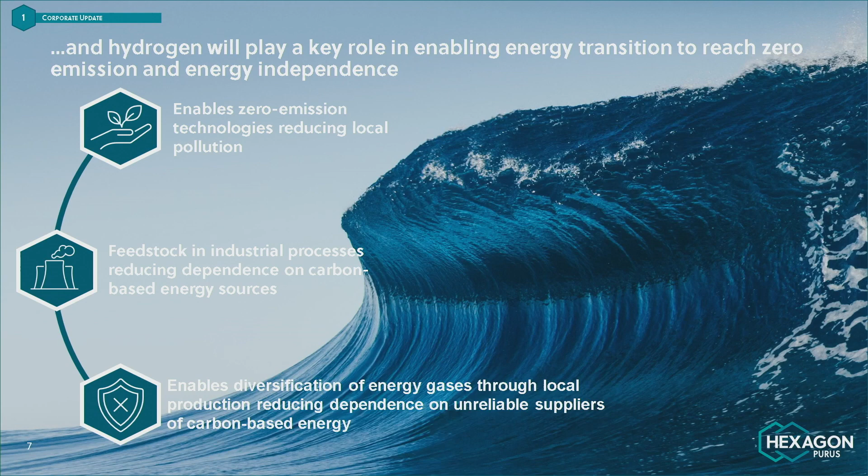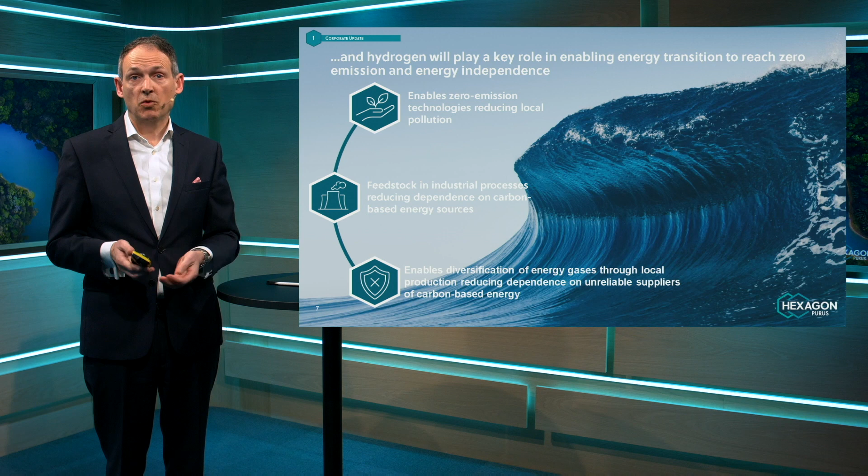Every sector of society will need to reduce harmful greenhouse gases from their operations. The transportation sector is responsible for almost 20% of global CO2 emissions, and these emissions will need to be cut by 75% by 2050 if we're going to meet the 1.5-degree target set in the Paris Agreement.

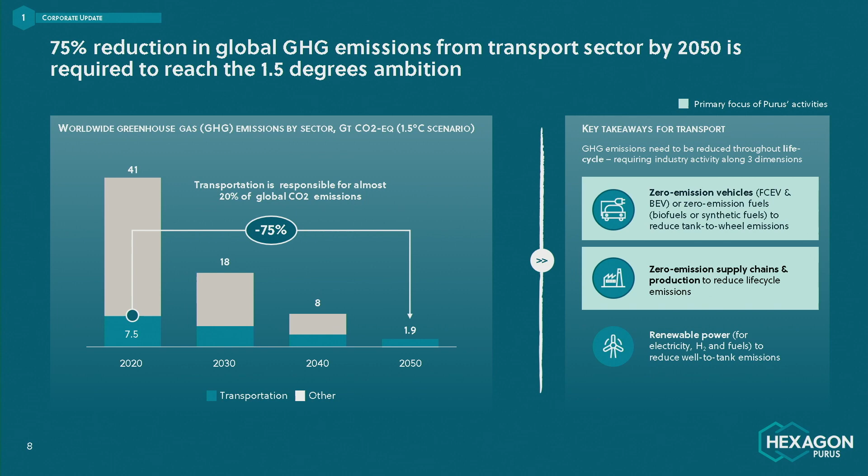This will require three things. Vehicles will need to be zero emission and electrified, either battery electric or fuel cell electric, so that they can run on renewable energy, with no tailpipe emissions or tank-to-wheel emissions. Number two, the supply chains, including production and distribution, will also need to be zero emission. And three, there needs to be enough renewable energy available. Then we will achieve zero well-to-wheel emissions.

And Hexagon Purus has an important role to play in achieving that target. We are a technology company providing zero-emission mobility solutions. We focus mainly on two areas. One is the mobility applications, the vehicles themselves, providing energy storage and vehicle integration. The other is the infrastructure side, the stuff that's needed for people to use the vehicles: hydrogen distribution modules, stationary storage, mobile refueling, and so forth. We provide technology that enables vehicles to run on renewable energy, and as such, we play a key role in the energy transition and in the overall quest to remove carbon emissions from the transportation sector.

There are two main technologies to support zero-emission drivetrains: hydrogen and batteries. These are often talked about as opposing technologies, that it's either one or the other. We don't see it that way. We believe these are complementary technologies and both are relevant. Each has its pros and cons, and which one you choose mainly depends on the customer requirement and the duty cycle the vehicle needs to serve.

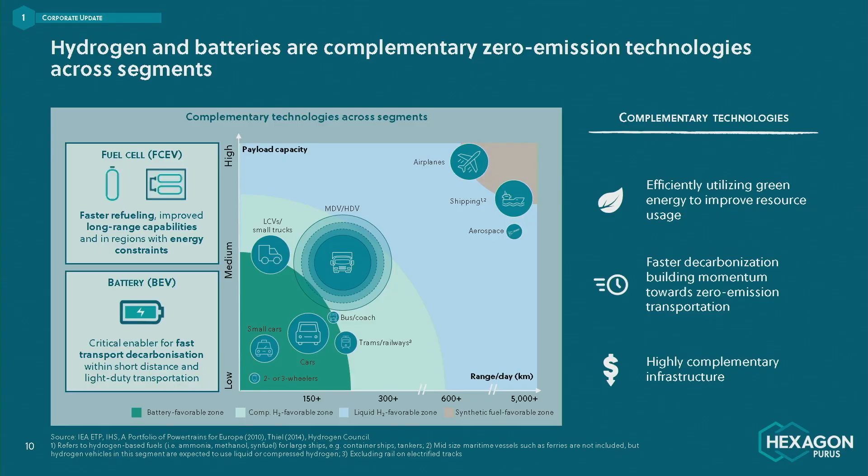Battery technology for vehicles is by now well proven. Batteries provide very efficient energy storage, but they're heavy and take a long time to charge. Hydrogen technology is a few years behind in maturity, and although less energy efficient, it gives you things you don't get with batteries: longer range and fast refueling.

So the main rule is: the shorter the distance and the lighter the weight, the more batteries will be competitive. And the opposite of that is the longer the range and the higher the payload, the more hydrogen will be competitive. Looking at this illustration, you see the two key parameters of the duty cycle, payload and range, and the typical zones favorable for each technology.

Let's take a couple of examples. Passenger cars are reasonably lightweight and don't have much payload, and the majority typically travel fairly short daily distances. We believe most of those will be battery electric. The typical electric passenger car today gives you 400 to 500 kilometers of range, which is more than enough for most people, and you can charge it at home during the night.

There will likely also be some hydrogen electric passenger cars, those towards the heavier side of the spectrum, or those that require more continuous use. But most of them will be battery electric.

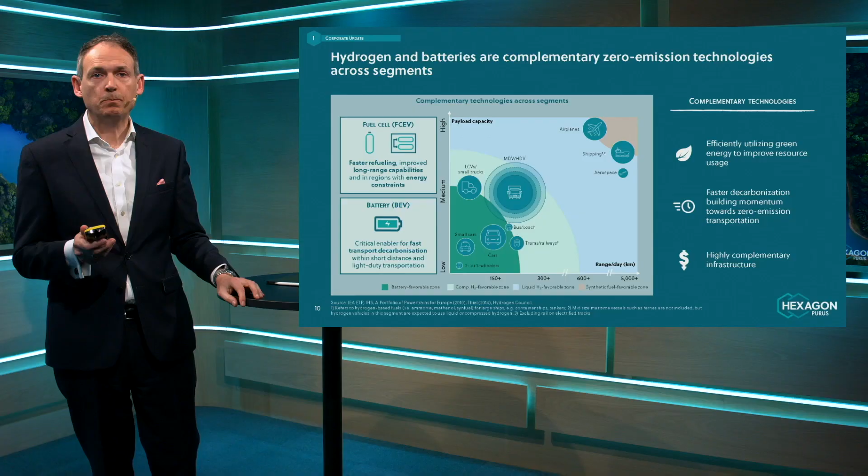These systems go on to the end-use applications, the vehicles, and we make energy storage systems for a wide range of vehicles across the mobility spectrum: cars, buses, trucks, trains, maritime vessels, and also for the infrastructure part: distribution modules, stationary storage, and mobile refueling units.

In North America, we also provide electric drivetrain integration and full vehicle integration for medium and heavy-duty trucks, again both battery and fuel cell electric. So we provide energy storage technology that enables vehicles to operate on renewable energy, but we don't provide the electrons, we don't provide the molecules.

Let's zoom in on our part of the value chain and look more closely at what we do. We work on three different levels: the component level, the system level, and the vehicle integration level. Starting with component, the core component in our offering is the hydrogen storage cylinder.

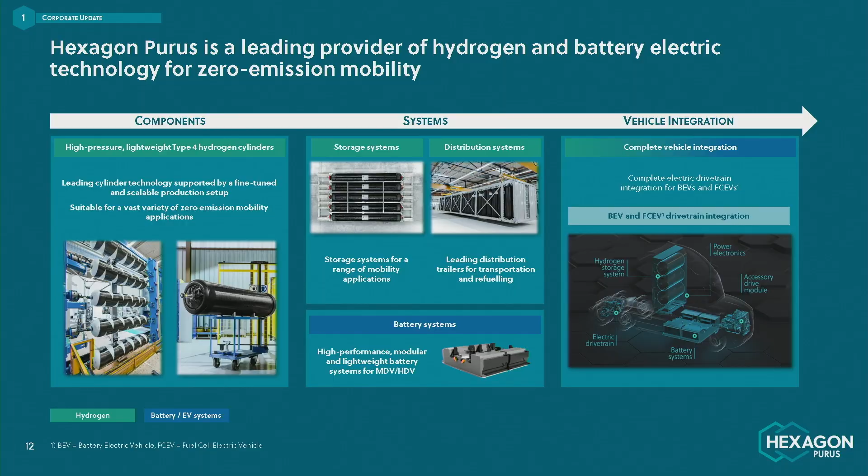The Type 4 cylinder is a pressure vessel that has a polymer inner liner overwrapped with high-strength carbon fiber. This cylinder is extremely robust and durable, while also lightweight, which makes it ideal as a tank to store compressed hydrogen gas on board vehicles.

It's far from a trivial component, since hydrogen is typically stored at an operating pressure of 700 bar. But as I will show in a minute, we have several decades of experience with this technology and know it very well.

So we can sell this cylinder as a component, and there are some customers that prefer that, but most often the cylinder is sold as part of a system. And the system is simply a combination of cylinders placed into a metal frame, complete with valves, piping, regulators and so forth, that feeds the hydrogen from the cylinder to the fuel cell or wherever it needs to go. The system can either be a storage system for vehicles, or for distribution or infrastructure purposes. Michael will come in later and explain this in more detail.

And Todd will cover the battery system, which is a similar concept really, a collection of battery cells packaged together and optimized for storage of electrons on board a vehicle.

The third level is the vehicle integration side of the business. This is where we provide engineering design and full electric drivetrain integration for heavy-duty vehicles in North America. Starting with an empty chassis with 4 wheels and a cab on it, we design and assemble the complete drivetrain with a combination of our own storage systems, either battery or hydrogen, and third-party components to deliver a fully operational vehicle. So Todd's going to do a solid deep dive on this later on in the presentation.

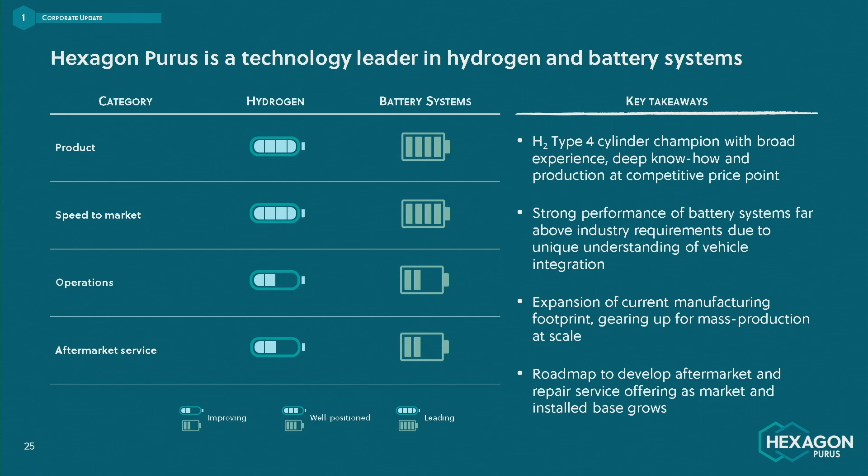We stack up well against all of these, where our edge is the product, driven by our deep technological know-how, and also the speed to market, driven by our strong customer-driven and technology-driven organizational DNA. When it comes to manufacturing and aftermarket service, we have some way to go, compared particularly to the automotive tier 1s who have mass production and cost reduction as a core part of their DNA.

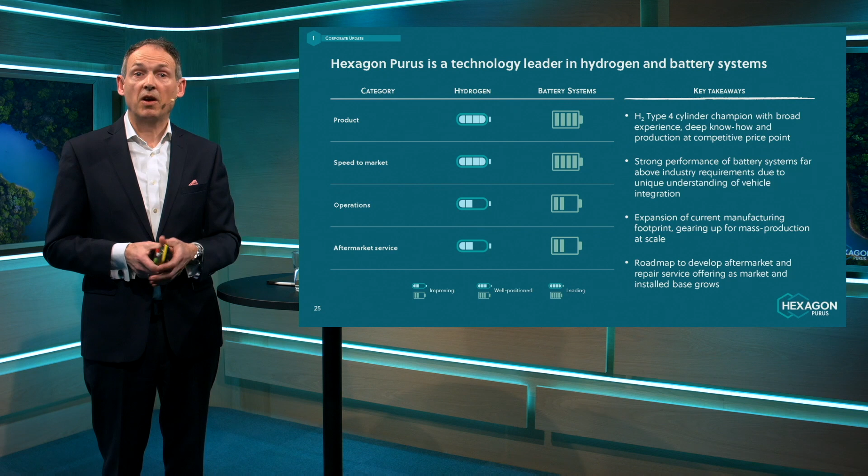However, mass manufacturing of composite pressure vessels, a highly engineered and specialized component, that's not trivial. It's actually quite challenging, as we also have learned over the past decades. There are very tight tolerances and zero room for mistakes. And remember that Hexagon is the company that has produced the most high-pressure Type 4 cylinders of any company. So we already have solid process knowledge.

But we will also need to build stronger manufacturing capabilities at larger scale. And we will need to build up a good service and repair organization along with the rapid increase of the installed base.

I do expect that there will be other players coming into the market in the future. This will grow quickly to become a very large market over the course of the next decade or so. And all the mobility segments and vehicle platforms will be transitioned away from fossil fuels and over to zero-emission drivetrains. And this will attract more players into this space.

I'm not concerned about it. We welcome competition. We need competition. Any healthy market needs several competitors to fight for customer positions. We're confident in our own capabilities. We are industry leaders today, and we believe that we will be able to stay ahead of the competition and remain industry leaders also in 2030 and beyond.

And the key to competitiveness will be cost efficiency, and the lowest total cost of ownership for the customer. This is why it's important to be an early mover and to win the early volume business, so that we can get faster up the learning curve and faster down the cost curve.

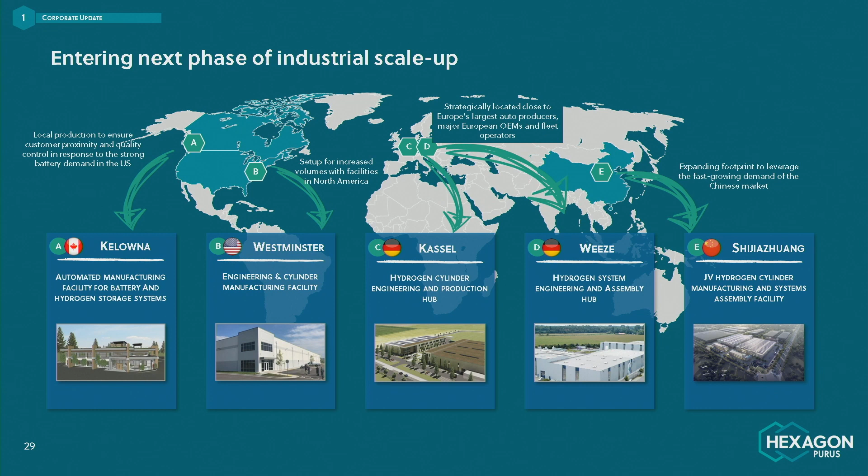And we have finally kicked off construction of the new facility in China, which we're building together with our joint venture partner. That will go up in Shijiazhuang, a few hours southwest of Beijing. So with these expansions, we will have the necessary capacity to meet expected customer demand towards the middle of the decade.

So that concludes my part of the presentation today, and I will now hand the word over to Michael Kleschinski, the Executive Vice President who heads up our cylinder and systems activities in Europe. Michał, please.

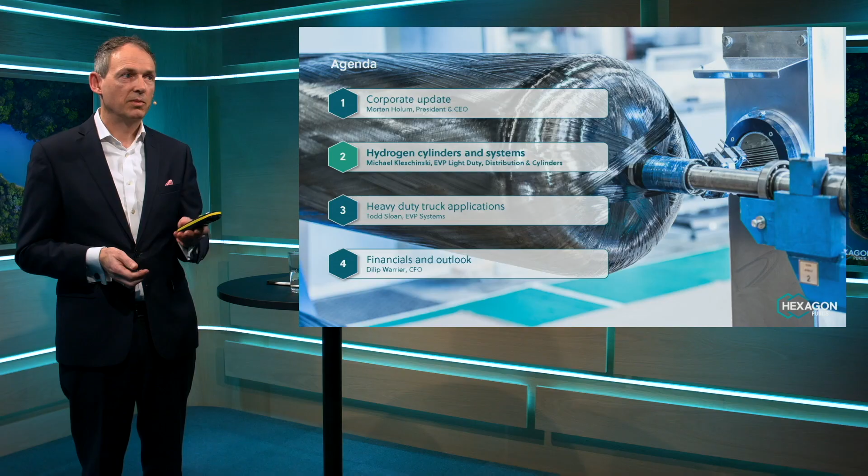Thank you, Morten. Let's have a look into our hydrogen cylinders and systems business.

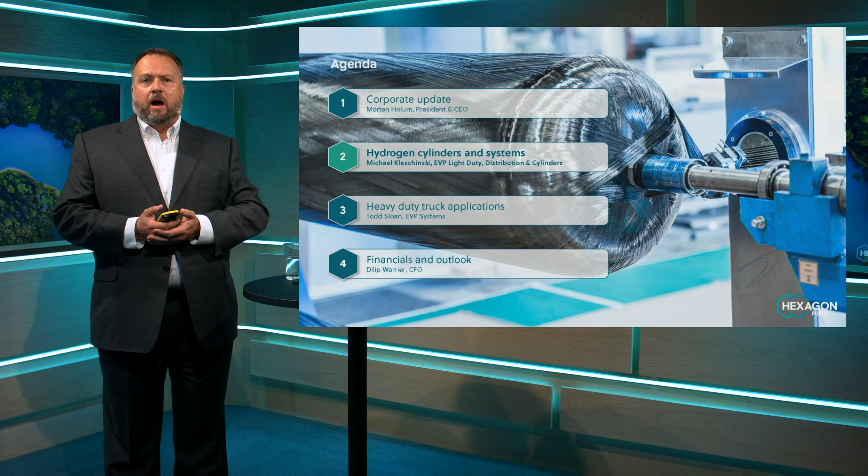Hydrogen is an important building block in decarbonization and energy independence. In the future, all hydrogen will be green, coming from electrolysis powered by renewable energy like wind and solar power. Hydrogen is the ideal partner of renewable energy, as it allows storing large amounts of energy until it's consumed.

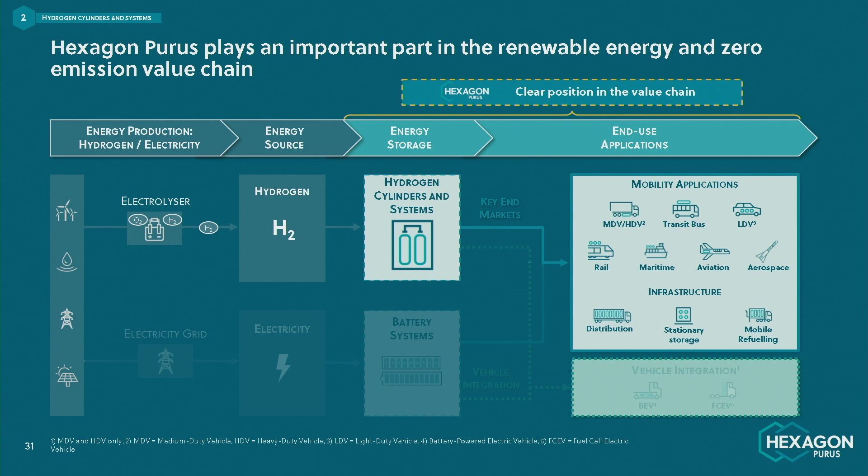Renewable energy is decentralized, so solar and wind is mostly not found where the energy is needed. Additional to storing the green energy locally, we must be able to transport the green energy to where it's needed. This is what hydrogen is capable of, and these are the solutions that we bring to the industry.

Our solutions are able to capture the hydrogen-bound energy and bring it to where it's consumed in industry and transportation. We don't make the molecule, but we store compressed hydrogen and provide storage and transportation solutions to the end-user applications. Our solutions are therefore an important building block of the hydrogen infrastructure.

In mobility, we provide onboard energy storage to all kinds of mobility, on-road and off-road as well.

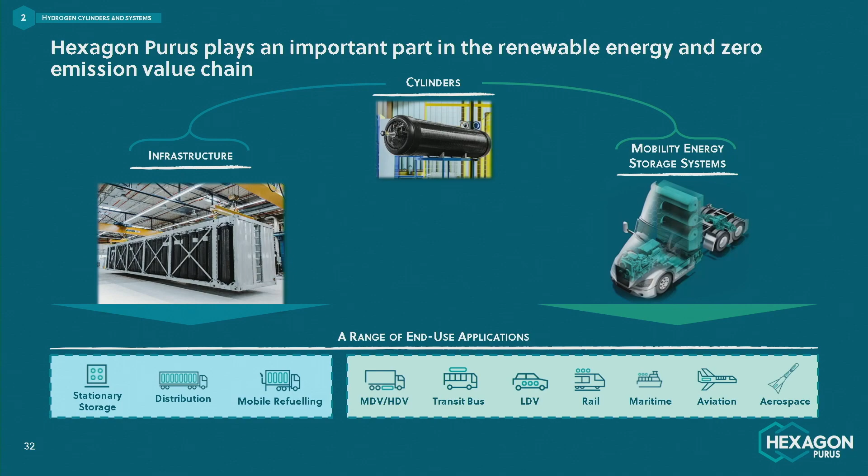Hydrogen has the highest gravimetric energy density of all energy carriers. The volumetric energy at ambient conditions is comparably low, and therefore we need to compress hydrogen to obtain high volumetric energy density as well. So what does this mean? Well, it allows us to accommodate the required energy in the space available in end-user applications like a car or a truck. As an example, to accommodate the necessary amount of hydrogen on trains or transit buses, we need to compress the hydrogen to 350 bar, so 350 times atmospheric pressure.

Other than compressed, hydrogen can also be stored in different states. For example, we heard about liquid hydrogen today. Still today, compressed hydrogen is a more mature technology over alternative technical solutions with a lower technical readiness level. More importantly, compressed hydrogen offers the best total cost of ownership in a broad range of applications.

So it all starts from a cylinder that can store compressed hydrogen, and the majority of the applications is in mobility. The cylinder is made from lightweight materials, mainly high-strength carbon fiber. We use these cylinders in a large variety of hydrogen storage and transport systems along the value chain of hydrogen.

Our hydrogen systems serve from close to the hydrogen production up to the onboard storage of hydrogen in all kinds of mobility.

Looking at the end-user applications at the bottom, it all starts with infrastructure. So from left to right, we provide stationary storage solutions. These are used close to hydrogen production, as well as in fuel stations where compressed hydrogen is required at pressures up to 1,000 bar. Our distribution solutions carry up to 1.2 tons of hydrogen on road and in intermodal traffic.

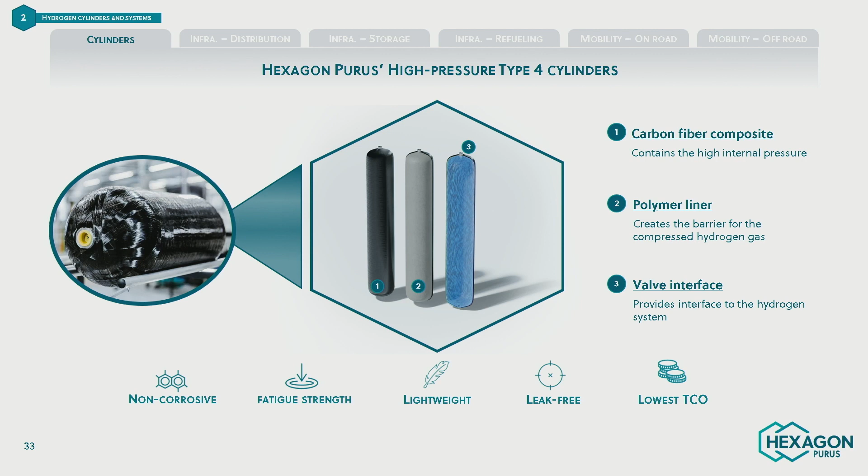The inner shell is a liner that contains the gas and assures leak tightness. The interface between the plastic liner and the boss, the only metal part in the cylinder, is crucial to assure leak tightness over a lifetime of up to several decades. The boss is also the interface to the valve, which connects the cylinder to the piping network of our hydrogen system and also acts as a safety device.

There's not one cylinder that can serve all solutions. All cylinders have different dimensions and operating pressures, depending on the use case, and are designed according to different standards. Trucks are different than trains, mobile storage is different than stationary storage, and buses are different than ships. Good news though, we have tailored cylinder solutions for all applications.

Hydrogen distribution is what we call bulk hauling of compressed hydrogen on road. These kinds of solutions are the traditional way of hauling hydrogen as an industrial gas. We have more than 10 years of operations experience in this kind of hydrogen distribution. A strong driver for this solution will be the green shift in hydrogen production, creating demand to haul hydrogen from decentralized green hydrogen production to users in mobility and industry.

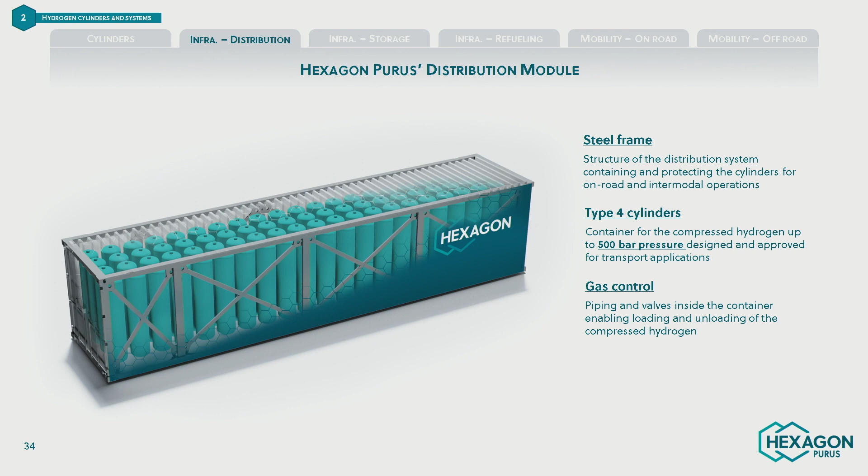The module has a customized steel frame according to the dimensions of standardized containers. Due to the standard dimensions, the container is compatible with several transportation solutions and doesn't require special chassis or carriers. The steel frame holds more than 100 Type 4 cylinders. The cylinder package itself is optimized to store the maximum amount of hydrogen without exceeding the maximum dimensions allowed in road transportation. Due to the low weight of the Type 4 cylinders, weight restrictions are not exceeded.

Increasing the payload is most relevant for the total cost of ownership in hydrogen transportation. So maximizing the payload and reducing the number of trips is key to bringing down the transportation cost of hydrogen. Today, modules up to 500 bar operating pressure are used, with payloads of up to 1.2 tons of hydrogen possible. Cylinders of higher operating pressures and therefore higher payload can be integrated as well, but unfortunately such modules can't be reasonably utilized today due to the lack of loading and unloading infrastructure.

The module has a gas control unit representing the interface to the loading and unloading of hydrogen. This container is smart ready, meaning all valves could be remotely controlled, and monitoring of pressure, temperature, and other relevant parameters can be integrated. This allows the operator of this solution to integrate the module into his gas logistics and optimize loading and unloading operations.

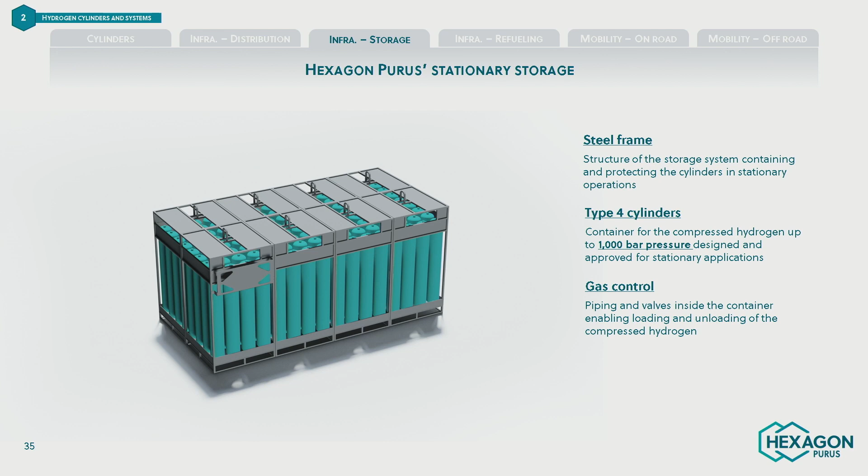Stationary storage of compressed hydrogen is required along the whole value chain. For example, storage of hydrogen adjacent to electrolysis with renewables, where the volatility of renewables creates demand for a buffer solution. On the other hand, dispensing of gaseous hydrogen requires stationary storage up to 1,000 bar to enable short refueling times versus direct compression. The stationary storage leverages system know-how from distribution applications and other standardized gas storage systems. At pressures larger than 500 bar, our more expensive ground storage solutions create a better total cost of ownership due to the significantly higher lifetime of our Type 4 cylinders compared to conventional low capex solutions.

While lightweight due to Type 4 cylinders matters for mobility, it is the Type 4 cylinder's durability that matters in stationary storage. In a recent project, a 4.4 metric ton, 500 bar stationary storage has been realized as part of a train refueling station.

Next, the mobile refueling system. It represents a mobile and highly flexible solution to refuel commercial vehicles. The current version enables refueling of up to 350 bar and is ideally suited for fueling of transit buses, medium-duty trucks, and trains. Our clients like Bosch and Deutsche Bahn are using these solutions to support pilot operations with fuel cell electric trucks and trains.

Other than stationary fuel stations, the mobile refueler is ready for operation in a short time. During the ramp-up of the hydrogen infrastructure, the refueler is therefore an important building block.

A mobile refueler consists of two units: a tank container that is used to haul the hydrogen on site, and the actual refueler. The refueler contains the equipment to dispense the hydrogen. The dispenser is fed from the high-pressure storage inside the refueler. Before being dispensed, the hydrogen is cooled down to increase the fueling efficiency.

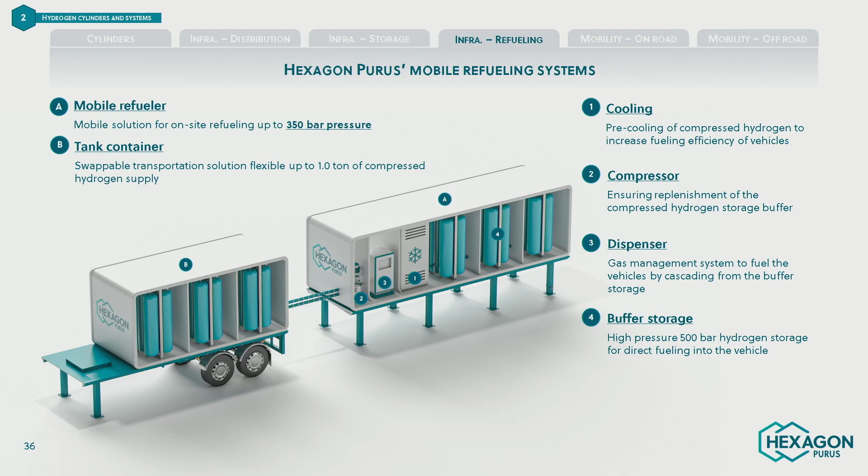After filling of a vehicle is completed, the onboard compressor replenishes the 500 bar storage to be ready for the next refueling. This system, as we see here, can dispense in back-to-back operations up to 4 buses, and during a day, approximately 10 buses can be fueled.

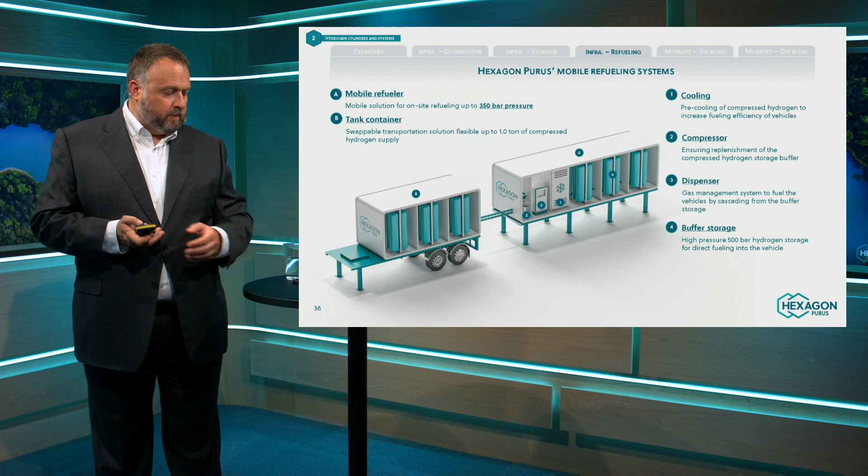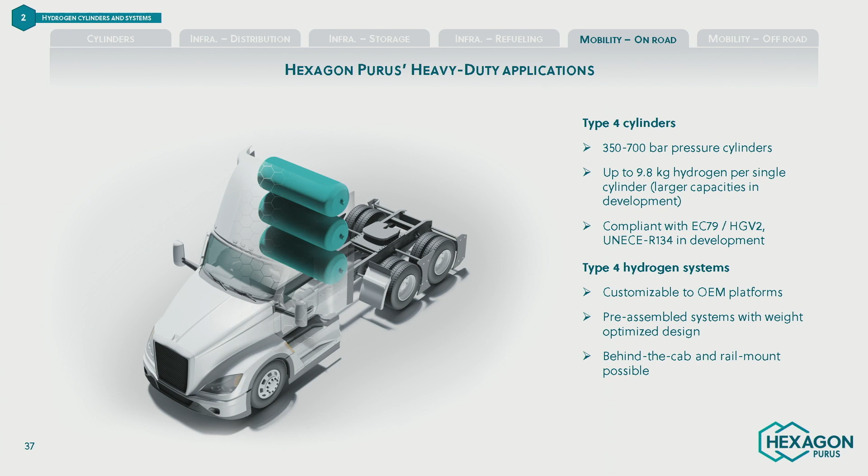Decarbonization of transport is a priority. So looking at heavy-duty trucks used in long-haul operations, weight and availability is crucial. This is where fuel cell electric trucks have a significant advantage over pure battery electric trucks. Generating the vehicle's range mostly from hydrogen enables short refueling times, combined with a comparable low weight. This allows maximizing the payload and therefore reducing the total cost of ownership.

The application in heavy-duty trucks requires custom large volume cylinders at 700 bar operating pressure. This creates the longest range at the lowest possible complexity of the system. The hydrogen storage system is specifically designed for reliable and safe operation. Additionally to the cylinders, the system integrates gas management functions. This ensures that hydrogen at the desired amount and desired pressure can be handed over to the interface of the truck.

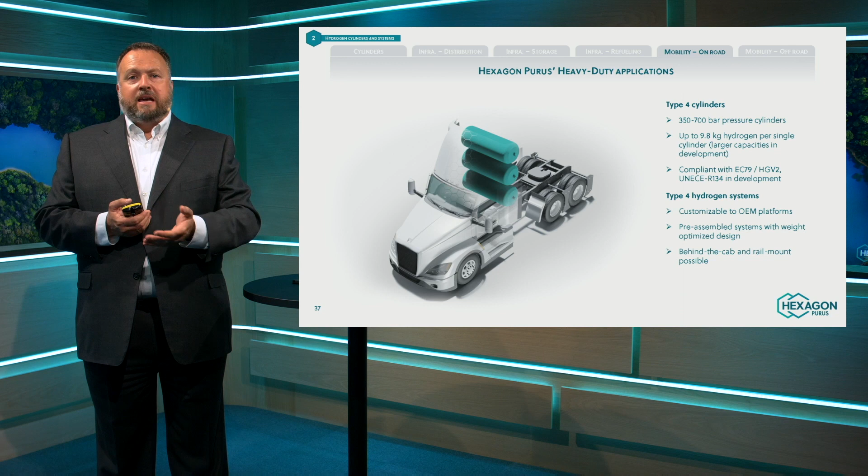The system is designed for inline assembly within the truck OEM's assembly. The option to integrate further equipment and accessories of the truck's powertrain allows further optimization of the assembly at the truck manufacturers. The system's architecture leverages decades of knowledge from the alternative fuel space, especially from natural gas. Therefore, our systems are based on the experience of millions of miles in operation.

We see here an example of a Class 8 heavy-duty truck like it's operated in North America. In this system, 4 large 700 bar cylinders enable storing more than 70 kilograms of hydrogen on the vehicle itself. Using additional cylinders mounted at the frame rails could lead to more than 100 kilograms on the vehicle, enabling even longer range operations.

Fuel cell electric buses are at the forefront of hydrogen adoption in mobility. The depot-based operations allow swift and efficient installation of the necessary infrastructure that is independent of the rollout of cross-country infrastructure. Our solutions serve buses up to a length of 18 meters. The standard hydrogen storage system can easily be adopted to the typical roof layouts of a bus OEM. This allows standardization and scale at an early stage.

Longitudinal-oriented cylinders on the rooftop enable maximum hydrogen storage at a minimum cylinder number, reducing complexity. An included fuel management system controls pressure and flow to meet the demand of the vehicle's powertrain.

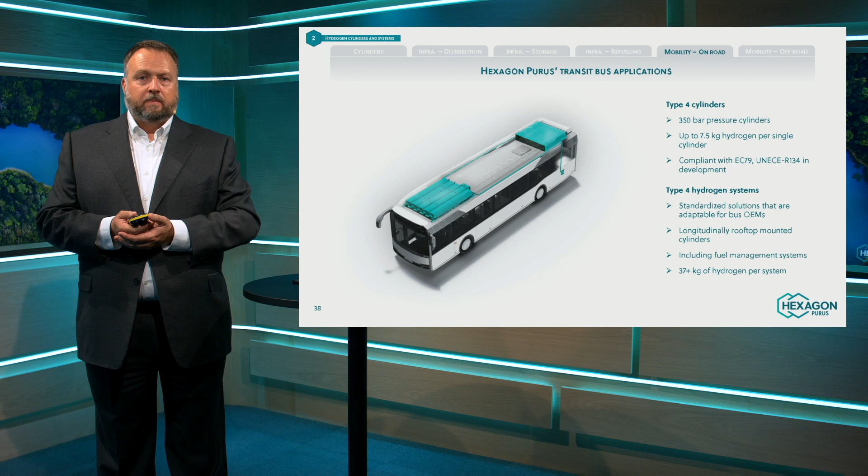While high-speed train lines are fully electrified, still a lot of train lines beyond the main lines are non-electrified. Today, such lines are operated by diesel-electric trains, and further electrification is cost and time intensive, and therefore fuel cell electric trains are an attractive solution for the replacement of diesel trains. Fuel cell trains can be a drop-in replacement for diesel trains due to their high range. This enables fast adoption as fuel cell trains can operate in parallel to diesel trains in the long period until total decarbonization of rail operations is completed.

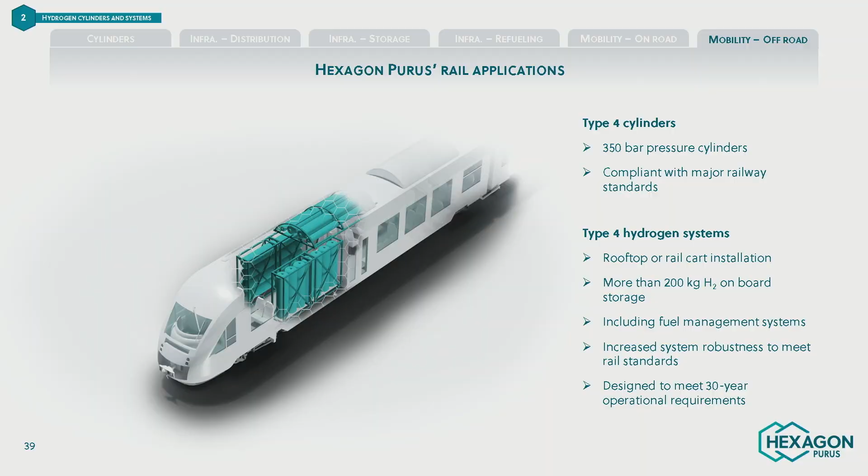Other than buses, the train layouts are not standardized. Therefore, customized solutions are required. As we see here, packages on the rooftop or within the rail cart are possible. Rolling stock has extensive operational lifetime of partly more than 30 years. In addition, rolling stock has high requirements regarding load-bearing capacity and robustness of the hydrogen storage system. This requires specific designs in accordance with the requirements of the major railway standards.

Similarly in the maritime space, high technical requirements meet an even higher level of customization. Based on a variety of hydrogen cylinders with up to 32 kilogram hydrogen storage capacity per cylinder, our naval architects designed the subsequent systems to accommodate the cylinders on board of ships in compliance with the maritime regulations.

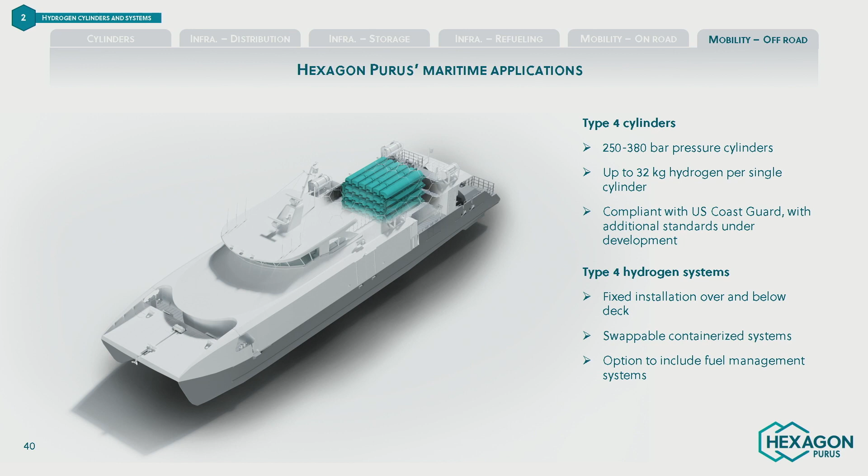Hydrogen systems can be packaged on deck or on top of the superstructure. In the latter case, lightweight systems are essential. Due to the required amount of hydrogen, swappable containers for improved refueling, or change of fuel storage, are also possible solutions. Piping and gas management is designed in compliance with maritime regulations. And in order to serve this particular field of the business, Hexagon Purus has set up a dedicated entity: Hexagon Purus Maritime.

So if we now look at the total addressable market for our diversified portfolio, we see an addressable market volume of 20 billion dollars in 2030.

Infrastructure-related applications will dominate in the early years and pave the path for future mobility. Hydrogen distribution will dominate the infrastructure market in the first half of the decade. Being less dependent on a fully fledged infrastructure, in particular transit buses, will also drive growth out of the gate and be a major part of the addressable market in the early years.

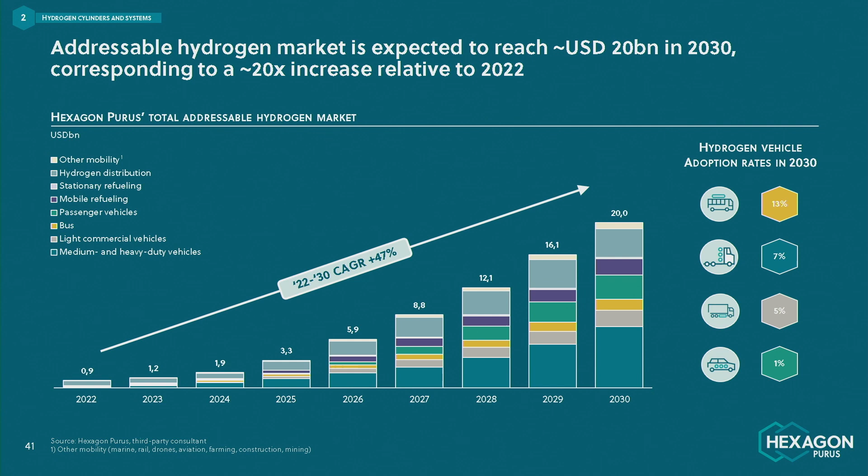Mobility will get more dominant in the second half of the decade, and especially transit bus, but also commercial vehicles, are expected to drive the demand. Like commercial vehicles, delivery trucks, but also larger medium-duty trucks will be a driver. We expect heavy-duty trucking and long-haul applications to be the largest driver of growth.

Passenger cars were high on the agenda of the OEMs in the early phase of the industry, but today we see that battery electric vehicles will dominate this market. Nevertheless, there will be applications for fleets and heavy passenger cars.

Although this addressable market represents nearly 50% CAGR till the end of the decade, all these projections are based on fairly modest adoption rates. Public transportation is an early adopter, not needing extensive infrastructure to ramp up. Therefore, we expect double-digit adoption by end of the decade.

In order to serve the addressable market, we are expanding our related production capacities within the relevant markets in the US, EU, and China. Looking from west to east, in Maryland we are moving our operation to a brand new facility in Westminster, more than doubling our footprint for dedicated hydrogen cylinder production in North America. Focus will be on larger cylinder production.

We have a vertically integrated production line getting ready to cover the growing demand, in particular for the heavy-duty truck space in North America. Furthermore, special cylinder production capacities are on site, and Westminster also serves as our engineering center of excellence for the North American market. This site offers multiple expansion capabilities, from additional cylinder production capacities to system assembly. The plant will be fully operational before the end of this year.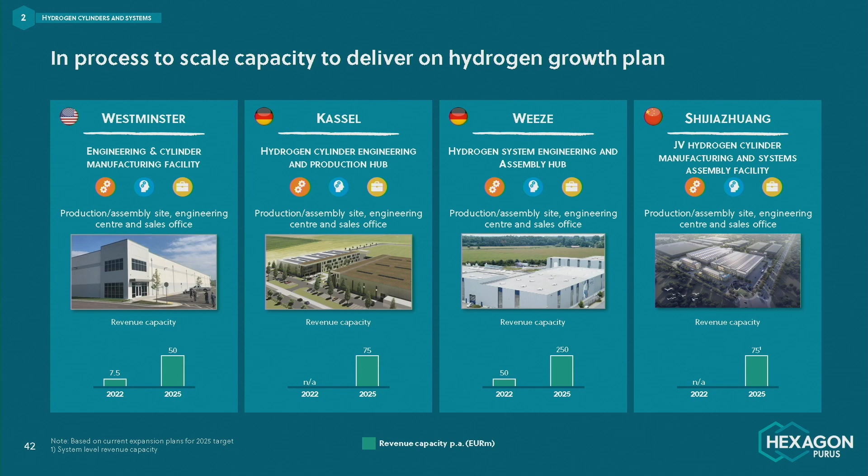of 450 million euro in total in 2025. We will continue to add additional production assets to these sites to continuously expand our capacity in line with our anticipated growth.

We are, as Morten also expanded on, the first mover not only in Type 4 cylinders in general, but also in hydrogen. The same is true on the system side. We bring more than two decades of experience with alternative fuel systems to the hydrogen space.

In order to stay leading in our field, we have a clear agenda to drive down cost significantly while the business grows further. I've illustrated this here with an example of a heavy-duty truck hydrogen storage system. The system holds four 700 bar cylinders, enabling long-range operation on the truck. Innovation around the product design and the production process will not only improve the offering and the customer experience, but also be the first pillar of cost down.

Efficient production is the next pillar of the roadmap. From our other Hexagon operations, we know how to manufacture more than 2 million composite cylinders per year. We will introduce this leading-edge mass production technology in the hydrogen space as well.

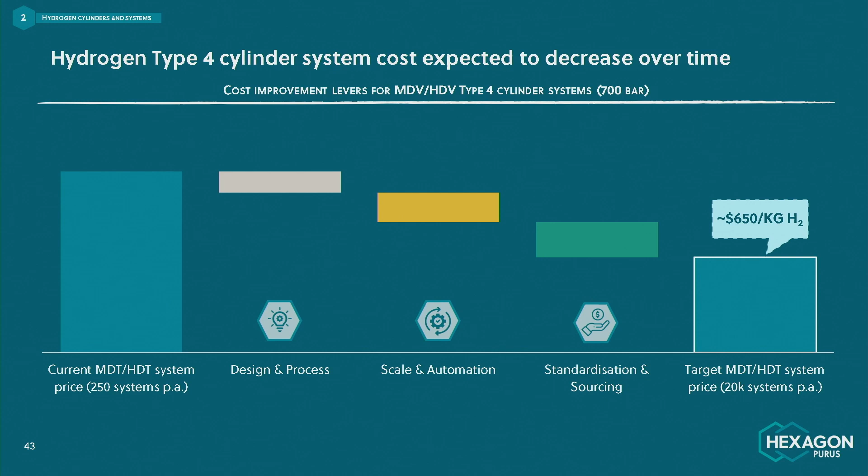And finally, standardization. Already today, we have cylinders and components that we use in on-road and off-road mobility, as well as in rolling stock. We will continue along these lines, so the standardization in combination with supply chain development will enable further cost down. In total, we see a price level of $650 per kilogram hydrogen stored. 20,000 trucks per year are already sufficient to reach this level. And this finally is a level we expect to see in the second half of this decade.

So in summary, we have built our technology in hydrogen cylinder and hydrogen systems over decades. We have a product portfolio for our broad range of infrastructure and mobility applications along the value chain of hydrogen. We are expecting a global addressable market of $20 billion in 2030. We're in the process to increase our global capacity and expect to reach a revenue capacity in the range of 450 million euros in 2025. Finally, innovation is key, and we will continue to drive costs down to remain leading in the industry.

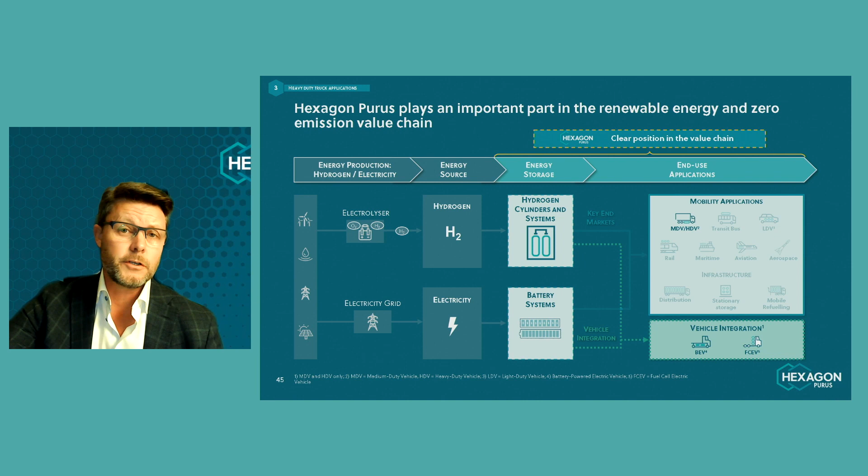I will now talk about the zero-emission systems and vehicle integration business based in North America. The Hexagon Purus Systems business unit is all about getting electricity to the wheels of commercial vehicles in the safest, lightest, and most efficient way possible. We understand the entire energy grid, taking into account the value chain from well to wheel, with sustainable development programs in place for second and end-of-life solutions of our energy storage systems.

Earlier, Morten and Michael both mentioned 6 decades of energy storage experience, but we also have over 20 years of systems and commercial vehicle experience that has led to this point. In that time, we have installed clean energy solutions on tens of thousands of commercial trucks and buses, accumulating billions of miles. We have served the majority of commercial vehicle OEMs in North America and have taken that knowledge to create leading battery and hydrogen storage solutions and full integration for both battery and fuel cell electric vehicles. With well over 1 million miles accumulated in the past few years on the Daimler Innovation fleet and other programs, we are well positioned to help grow the zero-emission commercial vehicle industry in North America and eventually expand to other global locations.

In the year 2000, we started a company called Enviromech Industries based in Kelowna, British Columbia, Canada. Having started my career in a tier 1 company supporting Western Star Trucks, which was an OEM located in Kelowna at the time, it was an obvious place to start the new business as they were already a customer. Western Star is now owned by Daimler Truck North America and located in Portland, Oregon. But a significant tier 1 supply chain still exists in Kelowna, which is only a half-day drive to Portland.

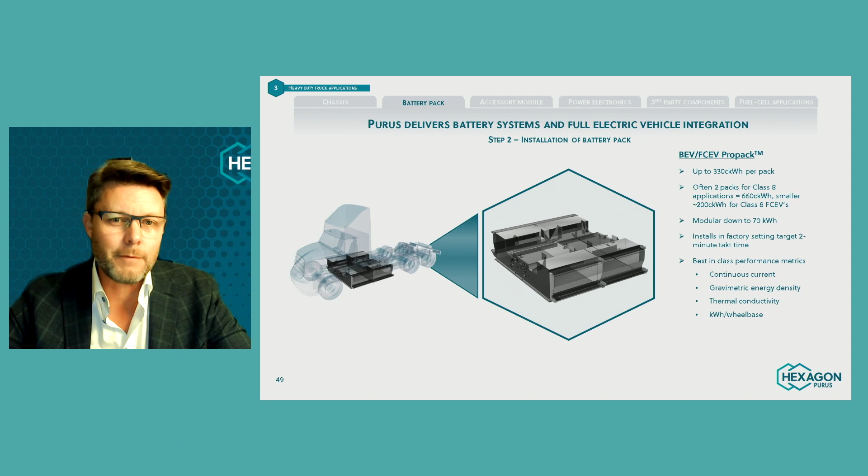Reducing stress on the cells improves their safety and lifespan. We also focus on providing the most kilowatt hours of energy for a given length of wheelbase, a metric we have learned over the past 20 years is critical to our customers that highly value small turning radii in tractor applications.

Next, we install our patented accessory drive module. All of the components that used to be powered from belts and pulleys spinning off of a diesel engine now have to be electrified. Like our battery packs, this needs to install in minutes on a factory line. All of the heating, air conditioning, power steering pumps, air brake compressors, 12 and 24 volt systems, and other components are assembled into this module.

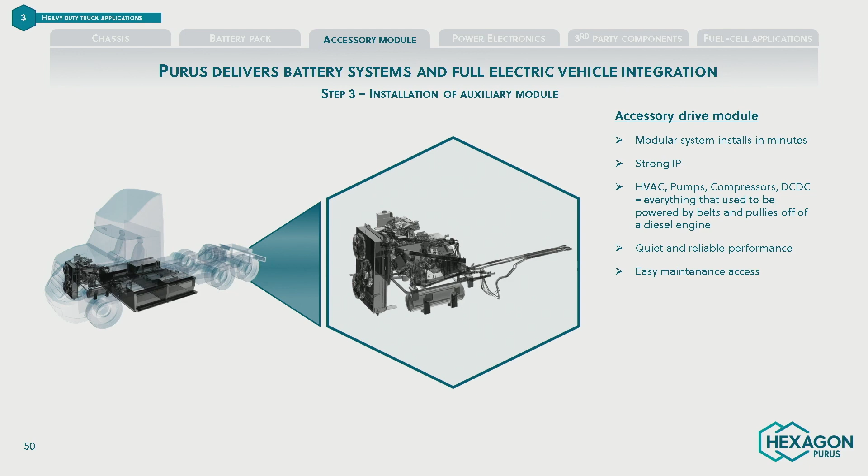We have designed our system to be one of the quietest in the industry and are constantly improving maintenance access for predictive and preventive measures to ensure the vehicles have as little downtime as possible.

Next, we install our patented power electronics and distribution modules. They can either be mounted vertically behind the cab or between and flush with the frame rails. Billions of miles of experience have proven better durability above rails on commercial vehicles, so when possible, this is our suggested location.

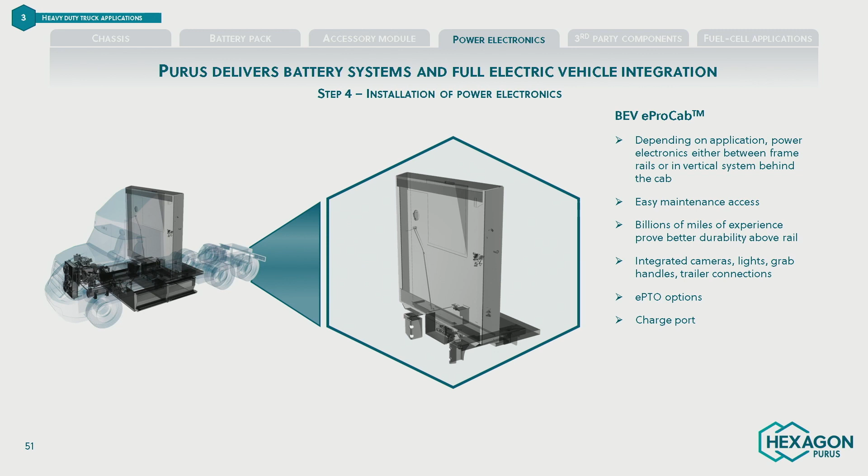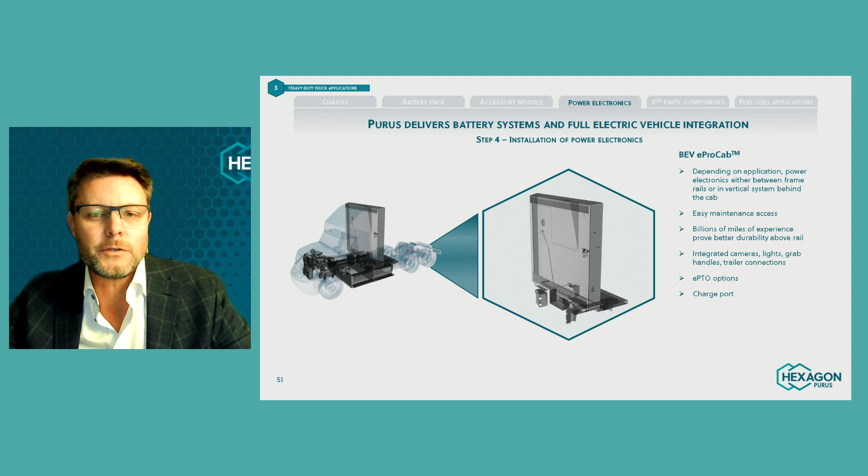To this, we integrate cameras, grab handles, trailer connections, everything that would typically be found on the back of a cab of a truck pulling a trailer. Like our accessory drive module from the previous slide, we put a strong focus on easy maintenance access, with options for charge ports, power to grid, and electrical power takeoffs to run refrigerated trailers or other pumps or compressors. This design is well suited to support various vocational applications.

At this point, the vehicle is ready to move electrical energy to the motors that power the wheels. One or more e-axles or central drive motors are installed onto the chassis. Hexagon Purus has developed software and validated numerous e-axle and motor combinations. Most typically, the e-axle company provides us with their drive inverter, which we install in our power electronics ePro Cab. This is also the stage where various axles, suspension, and brake options are installed.

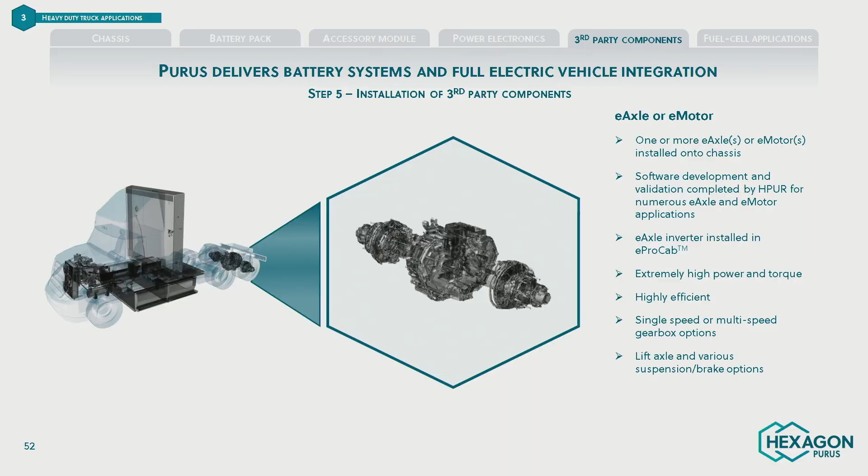The install is now complete, and the result is a high power, high torque, highly efficient battery electric commercial vehicle. To make a fuel cell electric vehicle, we first do everything I just described to make a battery electric vehicle. We install a ProPack battery system, the accessory drive module, and an e-axle.

Next, we install our ProCab hydrogen storage system, and to that we attach our ProCab power electronics module, which is only slightly altered for fuel cell applications. The fuel cells come from various third-party suppliers, and we typically mount 2 of those to the vehicle. We then install the Hexagon Purus fuel cell thermal management system.

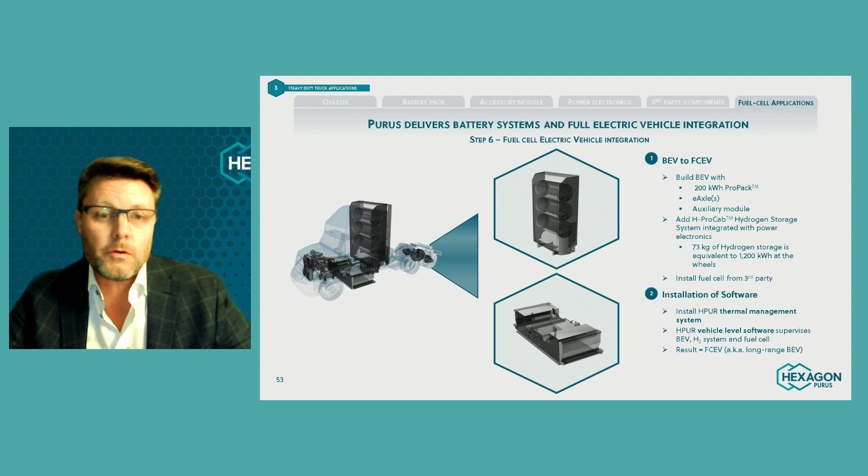Hexagon Purus developed vehicle level software that supervises the battery electric vehicle, the hydrogen system, the fuel cell, and the e-axle. That Hexagon Purus software supervises all of it. The result is a fuel cell electric vehicle. It has all of the features and benefits of a battery electric truck with the added benefits of longer range and significantly faster charge times.

Our addressable market for both battery and fuel cell electric commercial vehicles in North America is expected to reach $4 billion by 2030. Our agnostic approach means we don't have to debate which zero emission technology is better. Both BEVs and FCEVs will be ready to support our customers with their different locations and applications.

To support this growth, we will need to expand our North American locations, the newest of which is our soon-to-be opened microfactory in Kelowna, Canada, where we will now present a short video.

Hexagon Purus is excited to announce our new highly automated microfactory built in beautiful Kelowna, British Columbia, Canada. With Hexagon Purus's growing global footprint, Canada will see our newest factory opened by the end of this year.

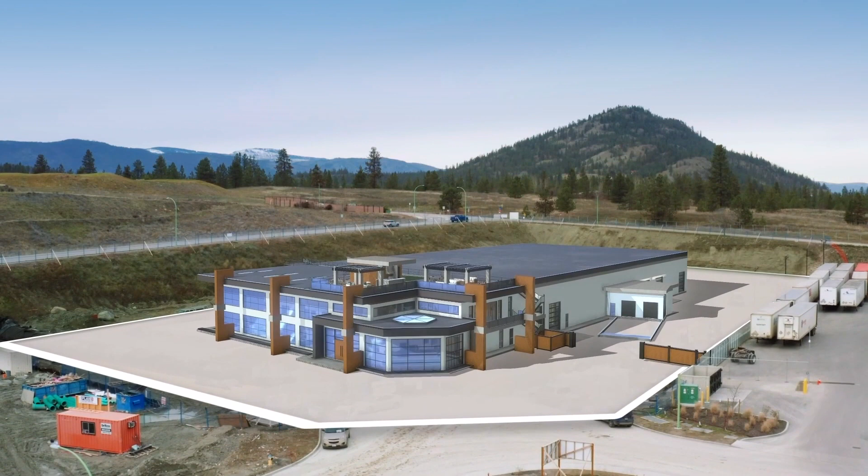The country is pledged to have net zero carbon emissions by 2050. Canada is the only country in the Western Hemisphere capable of manufacturing a zero-emission vehicle from start to finish. Canada's energy infrastructure ensures all segments of the supply chain can be supplied cleanly and sustainably.

In British Columbia, the Clean BC Plan is one of North America's most progressive climate action plans, and in 2021, British Columbia became the first province in Canada to release a comprehensive hydrogen strategy. With sustainable and clean resources to produce green and blue hydrogen, battery cells, and access to one of the largest seaports in the world, British Columbia is an obvious choice for our newest factory.

Just a few hours' drive from Vancouver and near the Canada-USA border, Kelowna's wineries, golf courses, ski resorts, mountains, and lakes make it an obvious choice for attracting the industry's top talent.

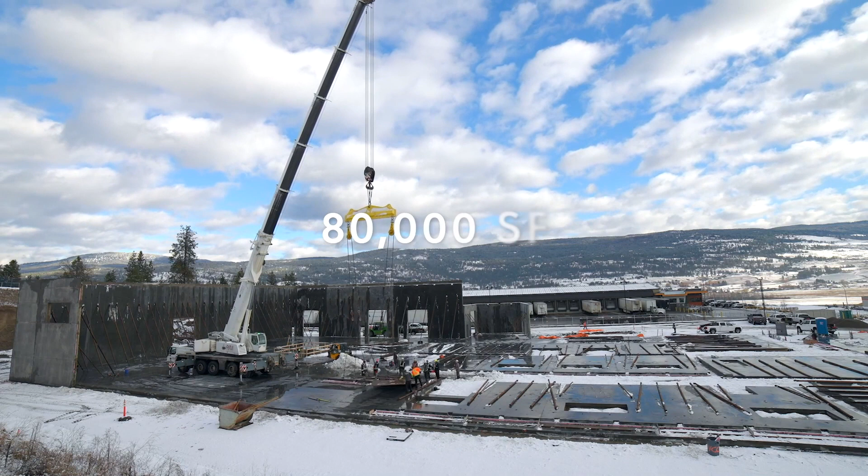Near an international airport and the University of British Columbia, the 80,000 square foot microfactory will produce battery packs and hydrogen systems for our growing list of OEM customers. This will also serve as the company's research, development, test and validation center for battery electric and fuel cell electric vehicle integration.

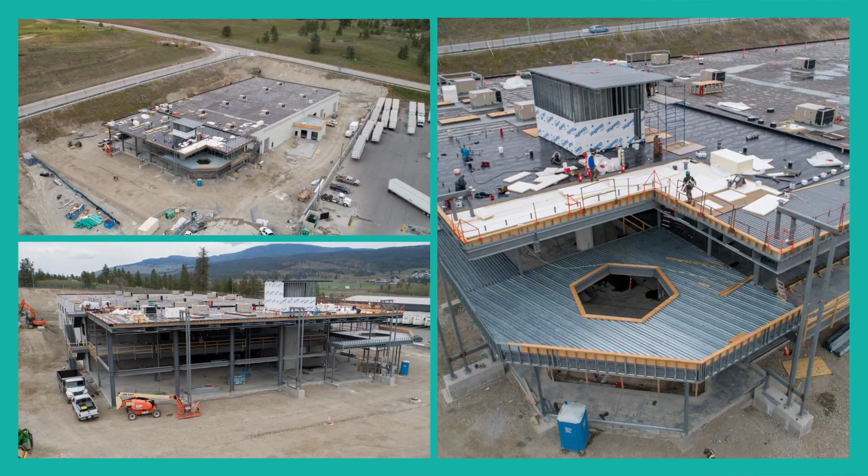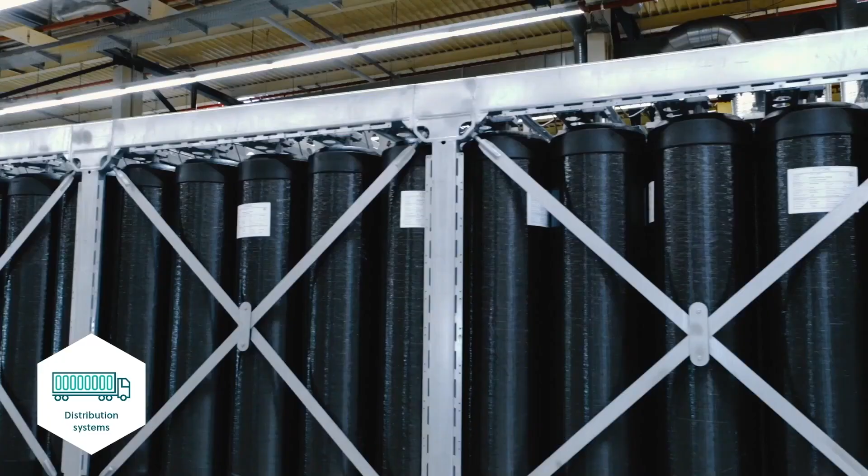When complete, the factory will be able to produce revenue of $250 million and will employ 150 people. We are very excited to open our new factory soon and will host many company and industry events as we take another step in fulfilling our vision of clean air everywhere.

Okay, thank you. It's important to understand that when we use the term microfactory, that doesn't mean there aren't large gigafactories strategically located to feed it. As an example, we need battery cell suppliers with at least 15 gigawatt hours of capacity and carbon fiber plants able to produce millions of pounds annually in order to reach economies of scale to drive down costs.

When considering logistics, packaging efficiency, and sustainability, however, the final assembly of battery packs and hydrogen systems makes good sense close to where the final OEM vehicle assembly occurs.

The Kelowna Microfactory will be used to continuously improve and validate our highly automated manufacturing process, the improvements of which will be replicated at various new locations as the industry grows. It's logical that as industry volumes increase, the size of microfactories will also continue to grow over time.

When considering the price targets of commercial battery packs, it's important to understand that not all packs are created equal. For battery electric passenger cars, most OEMs are planning cell-to-pack designs that can leverage their relative light duty cycles and driving conditions to bring down costs significantly as volumes increase. As a result, most of the pack cost is associated with the battery cell.

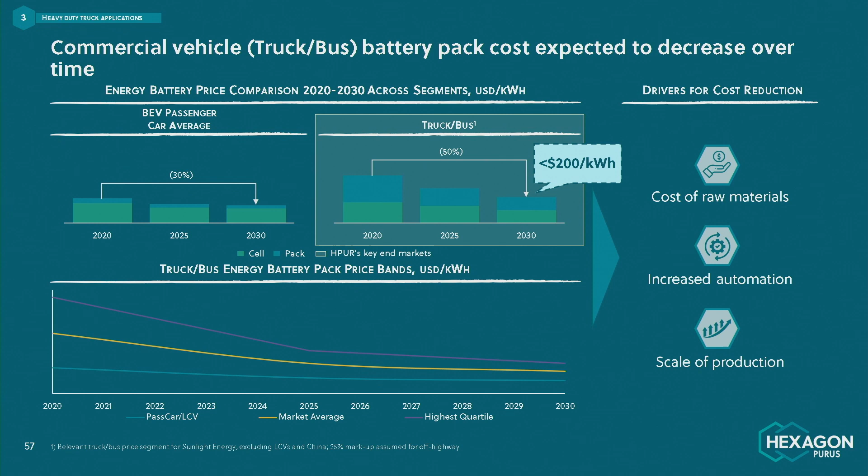For medium and heavy duty commercial applications, however, the duty cycles are much more harsh and the packs need to incorporate many features, including cab access steps, side impact, ground debris protection, extreme spikes in power charge and discharge rates, all while surviving in extremely harsh ambient commercial conditions, including temperature extremes, road salt, gravel bombardment, and the high forces of trailer coupling, among others.

Due to the amount of energy stored on board, there's also more content needed for thermal management and the overall size and mass of the systems.

Although most of the cost of our commercial vehicle battery systems comes from raw materials, Hexagon Purus' focus on automation and scale will allow us to drive down costs and stay competitive with our peers. Through these efforts, we expect battery pack prices across sectors to converge through 2030, and we see a clear path to sub $200 per kilowatt hour pack pricing by that time.

Thank you. This concludes my portion of the presentation, and I'll now hand it over to Dilip, who will go through the financials and outlook.

So for the benefit of those who are new to our story or have missed our Q1 update, this is where we are in 2022. We continue to expect revenue of 900 million NOK in 22 and EBITDA losses to widen by roughly 50% from 2021 levels of 265 million NOK.

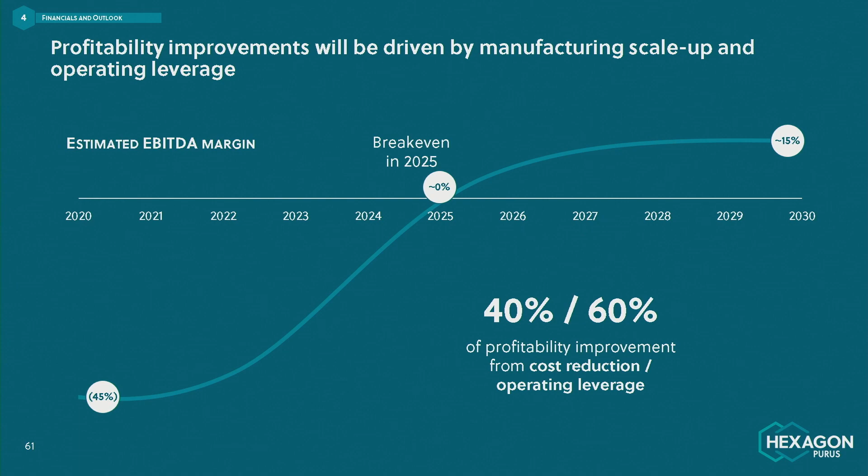Okay, on to EBITDA. As we grow our revenue towards our 2025 target and beyond, we expect that our contribution margins, which are already positive today, should increase as we take cost out, even as we share savings with our customers. This, combined with the benefits of improved operating leverage, will drive significant EBITDA improvement. Our goal is to achieve break-even EBITDA in 2025, and we believe we can achieve longer-term EBITDA margin in the mid-teens range with a suite of high-demand, highly engineered, non-commodity products. We believe that over the course of this journey, roughly 40% of EBITDA improvement will come from a reduction in cost of production, with the remainder coming from the benefits of operating leverage.

On to CapEx. We expect net capital expenditures of the order of 750 to 800 million NOK through 2024 in order to drive the capacity we need to meet our 2025 revenue goal. Note, these numbers are net of approximately 200 million NOK of external debt financing we expect to secure for Wystrach in Weeze. These also do not include certain acquisition consideration payments for Wystrach and Cryoshelter, as well as some capitalized product development initiatives. I want to be clear that these CapEx numbers reflect our currently approved plans, how we view the world today. It is possible that we could add to these plans should we see the need to do so based on customer demand.

And then for financial modeling purposes, it's a little challenging, right? It's hard to accurately predict the timing of this cash flow. But one could assume 30 to 40% of this amount expended in '22, roughly half in '23, and the remainder spilling over into '24. And with that, I'll turn it back to Morten.